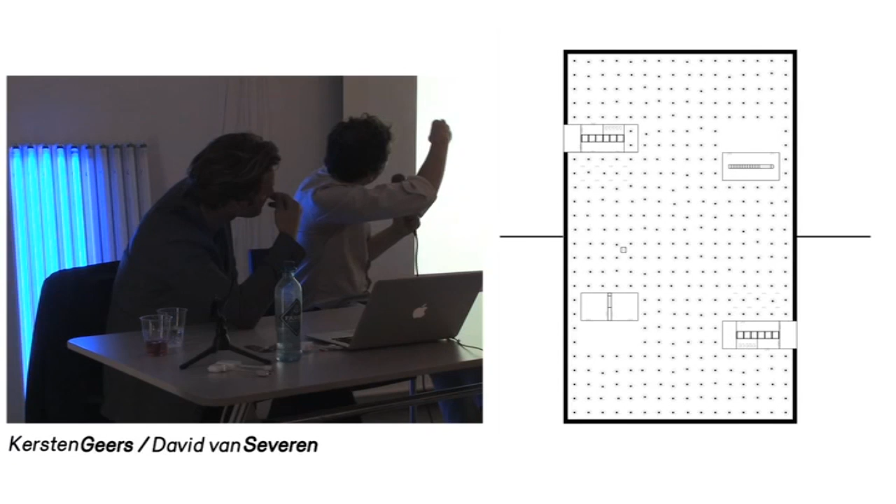You finally manage, or you don't manage, to cross to the other side, to the other pavilion, top left side. That's the whole idea, that's the procedure. Part of the question was also to incorporate on each side of the border a little library and a kind of community center. We decided to incorporate them both in the garden, but not as a result of unity, but as double twins—always two programs divided by a stair.

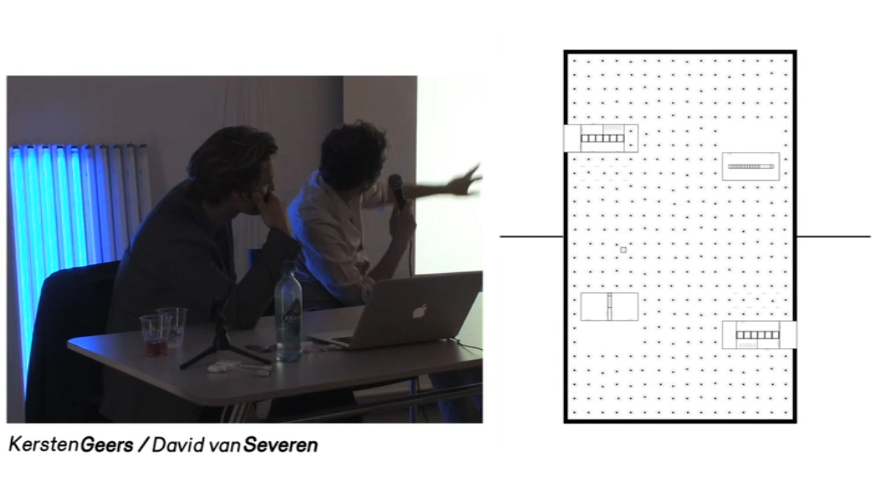In a sense, you could say the picture or painting Ed Ruscha painted, Talk About Space, is a frame. Frame is something which interests us—a frame, almost framing life as it is.

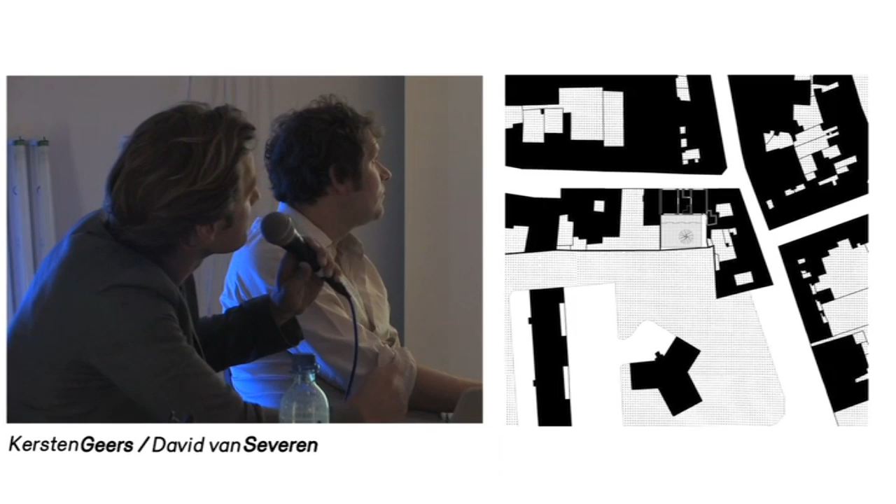The project Kersten showed before, of the Mexico-US border crossing, is of course a very good example of that. This is a house, a realization we made in 2007 in Ghent, Belgium. A house which you can see in this mass drawing—it's in the city, it's in a row, it's the one in the middle which has the tree, let's say.

When the client asked us to think about a renovation of the ground floor of that house, we saw an opportunity to actually make a new house, one which was completely the complement of the existing house.

The existing house is a traditional Belgian house, but of a big size. It was formerly a children's school, but was later transformed into a house. What interested us was the garden or courtyard, which over the years had been transformed with these typical back buildings added on.

We actually stripped the whole plan of the garden or the court to make a new house of it.

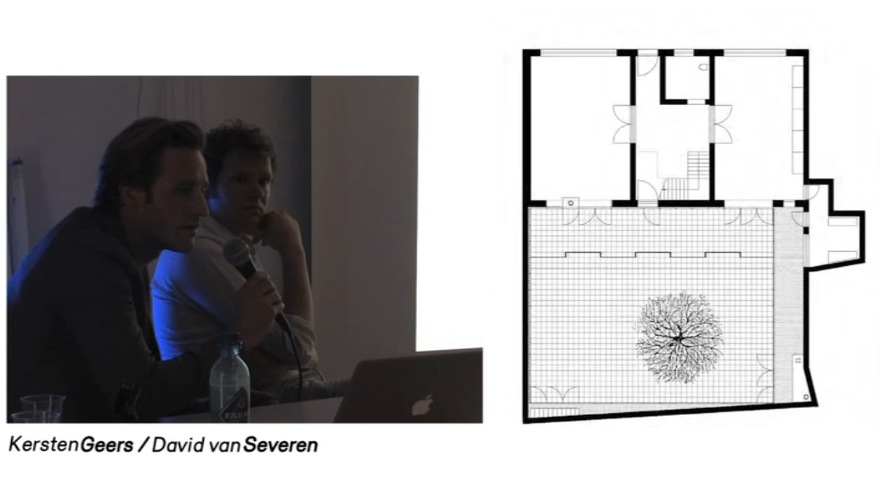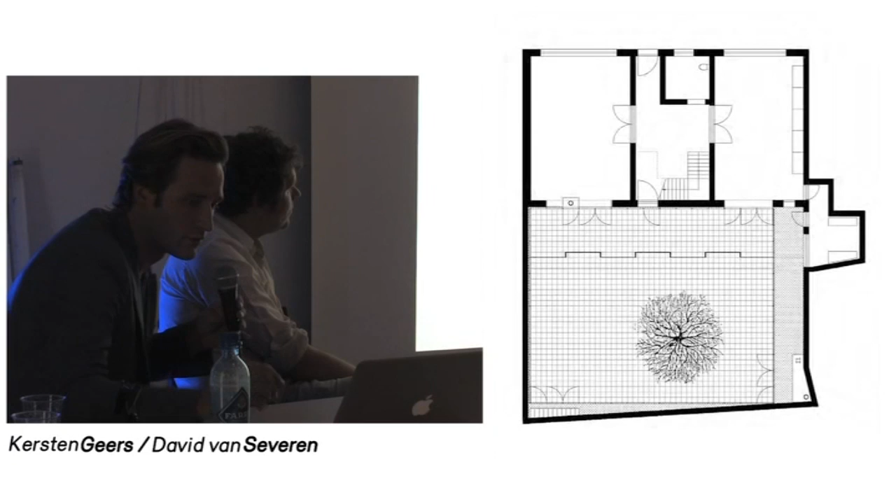By defining two houses, we could, in our opinion, make a new universe which could complement life in the original house, which is daily life as it goes. But we put something next to that, a house which is almost a summer house, a season house, a patio house, something slow in essence. It shows another world, and we designed it as its own universe.

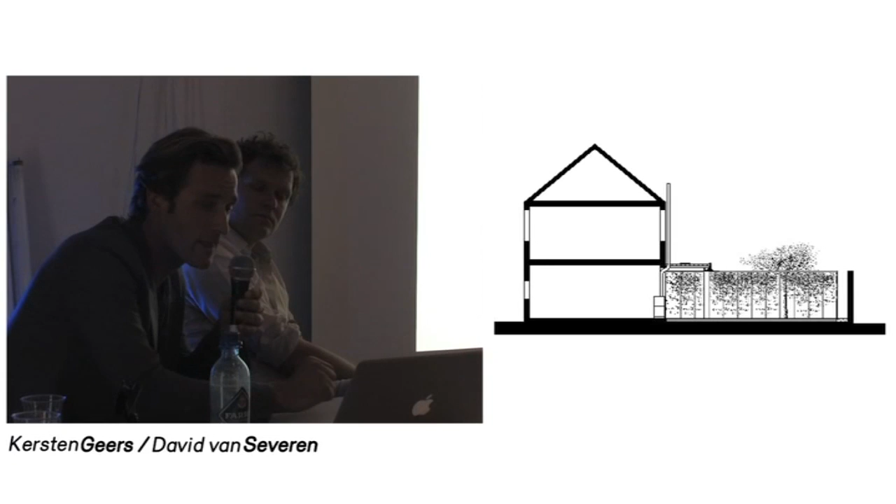As you can see in the plan, the drawing shows a grid of tiles, concrete tiles which had already been in the court, but which we rearranged into this rectangle, the defining size. It didn't fit really in the real situation, but that interested us.

By doing that, we decided to make a new horizon, a new height, which defined the height of the new house. This is a view from the winter house, you could say, into the summer house.

The confrontation of these two, walking in from one to the other, the switch of universes, was really what was on our minds.

Here you can almost see a facade, a rhythm of steel profiles, which is actually the whole perimeter of the house, surrounding this patch or rectangle of concrete tiles. That is the new patio house.

The patio house is also defined by its perimeter being a green perimeter. It's a garden, and it is growing vines. So wherever you are in the summer house or season house, you're surrounded by this modular system which holds basically Japanese vines, and these, being plants, change during the seasons.

In spring they have very small little leaves. In summer they become very big green leaves, and in autumn they color from yellow to red, and eventually fall down, leaving just the gray-brown branches of these vines. That kind of slowness was exactly what interested us.

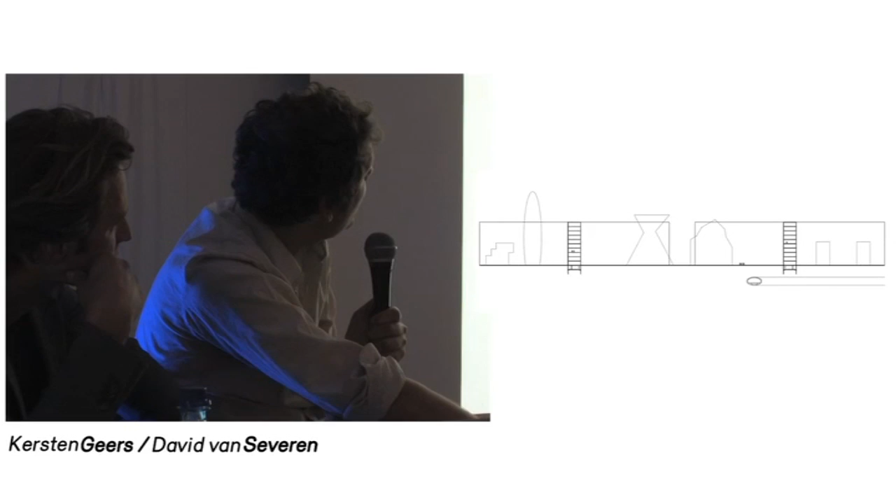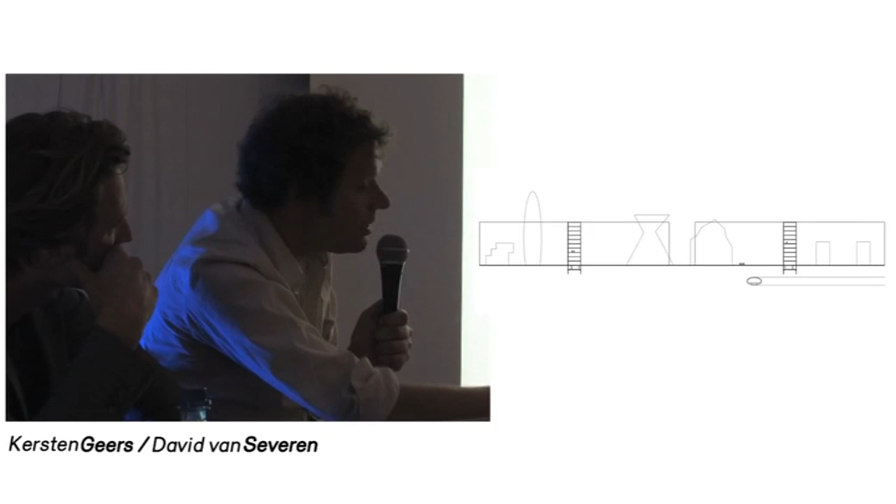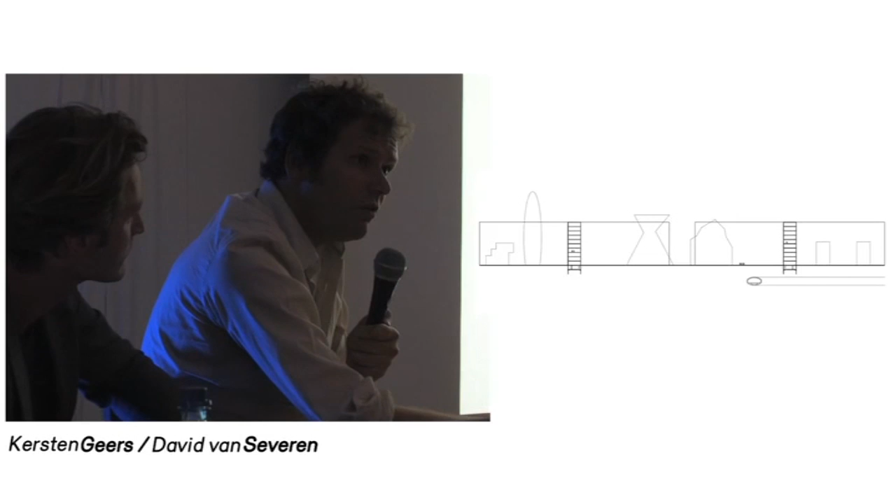You can imagine that something which fits in a 10-story high - because that was a very specific horizon which we had defined, because we thought it was important to give that city a kind of very stringent formal framework - in this 10-story high, between 12 and 13.5 meter wide buildings, there's things which fit, and all the other things, they do not fit, and they become objects or other things, or a slight little fragment of city fabric in between.

Of course, to design a city with architecture, to design it with building, does not start from a naive idea that there's no transport. It's rather an idea based on the fact that if you design a city today, which is built in the next 20 years, it's at least questionable to base that on the logic of transportation of now, knowing all kinds of questions about it.

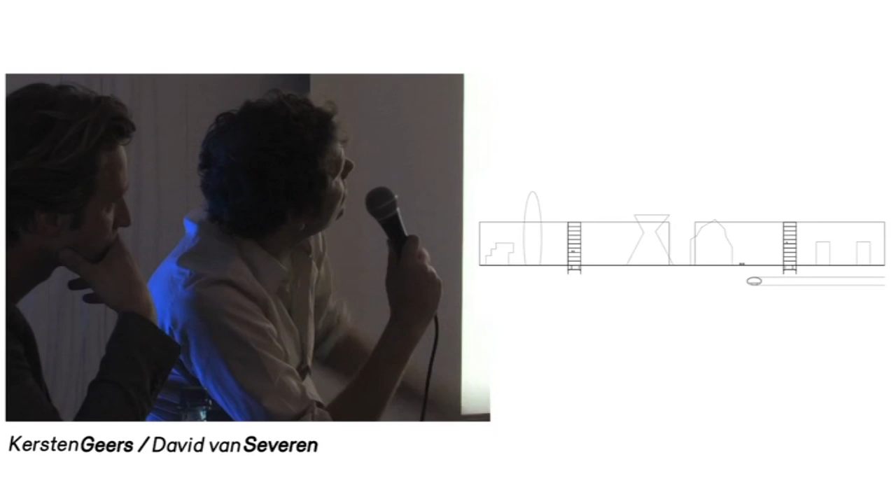So in other words, we thought it's a perfect moment to present the opposite - not forgetting about the way you could move around in such a city. A city of 3.5 by 3.5 kilometers is roughly walkable. Still, you can imagine metro or all kinds of other trams to make shortcuts. You can see that here in that section.

Ultimately, it is a city which is designed by that what in these perspectives you take away. So there's this fixed height, there's the fixed amount of dimensions which make the roofs. But the city life itself, life as it unfolds, is here represented by all the vividness and the colorfulness of the collages. So we made a set of collages showing what we were after, in which the architecture or the framework of the city as such, we cut out.

You see it here where, in a way, the infill becomes so big that it kind of inhabits the whole space, for example. Or you see it here where you see the cutout which defines the border between city and land. Because you have to understand that the proposal for a new administrative capital in South Korea was triggered by the idea to make, you could say, an anti-Seoul.

Seoul, the capital of Korea, being a sprawling city from a set of more or less specific centers which has no real border, the new city proposal has a very clear border and in fact develops from its border, and has, from that formal engagement, through city over citizenship, brings in this notion of collective responsibility, who knows.

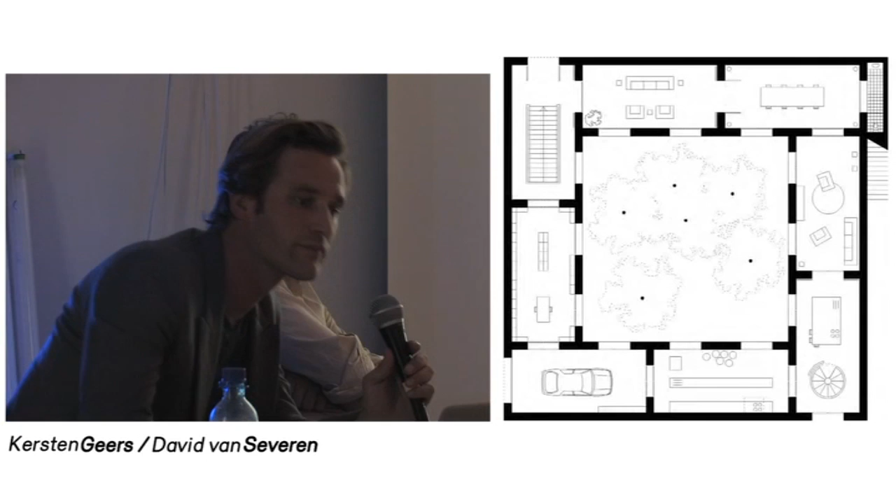I think the plan was very simple. You have to imagine we got a program like a Bel Air villa, with a big living room, the dining room twice, 2 kitchens, 2 garages, a library, 7 or 8 bedrooms, the master bedroom, and so on — everything in a big size. We thought the ultimate luxury could be that you just organize all this program in one typology, one room of the same size, which you repeat basically. In this plan, you can see it 8 times.

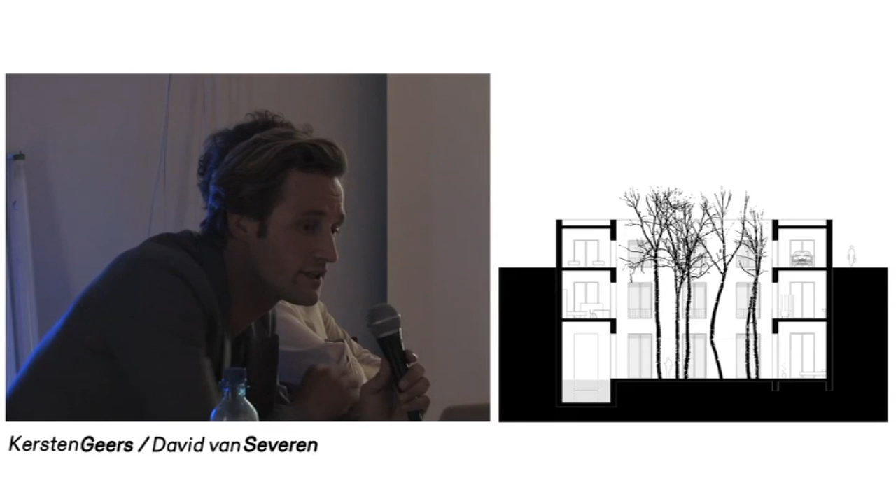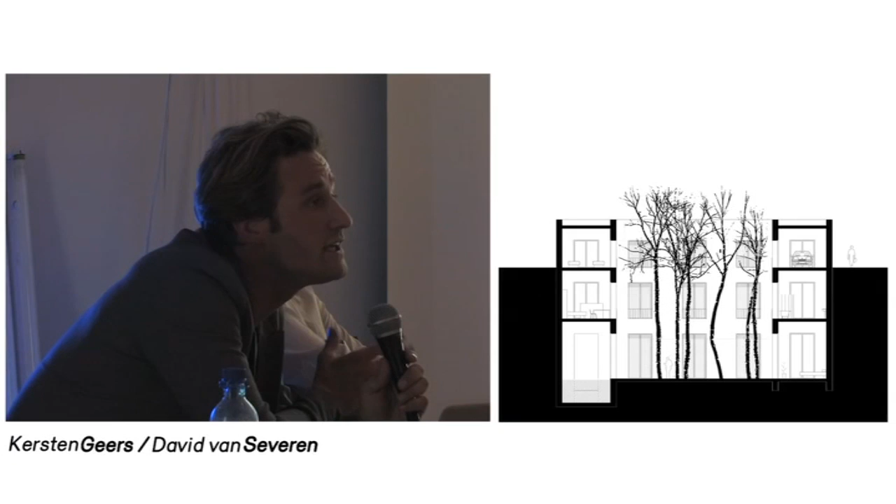But ultimately, the villa was keeping a low profile because it was actually dug into the ground. That was for the simple reason that it could profit from the constant temperature that the ground has, and be cooled in summer and a bit heated in winter, and could also, by organization of the rooms in this rectangle, integrate a patio, which becomes almost a microclimate for the whole house, where all the rooms finally look at or look into, and are also confronted with each other.

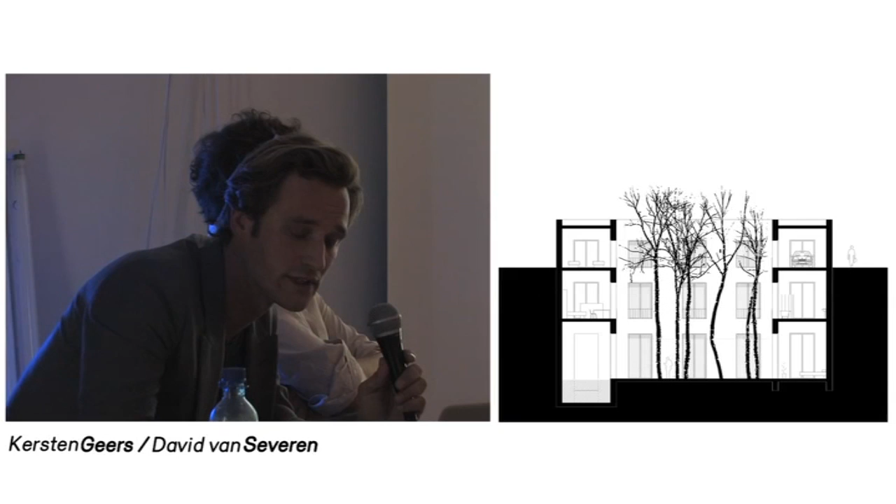As you can see also in the section, we made a slightly varying height, which got gradually bigger down to the patio level at -2.

So, after entering this almost low brick wall, you actually discovered the real space of the house, which was behind it and integrated into it, showing its pure repetition and abundance of spaces, which we thought was the ultimate luxury of that house.

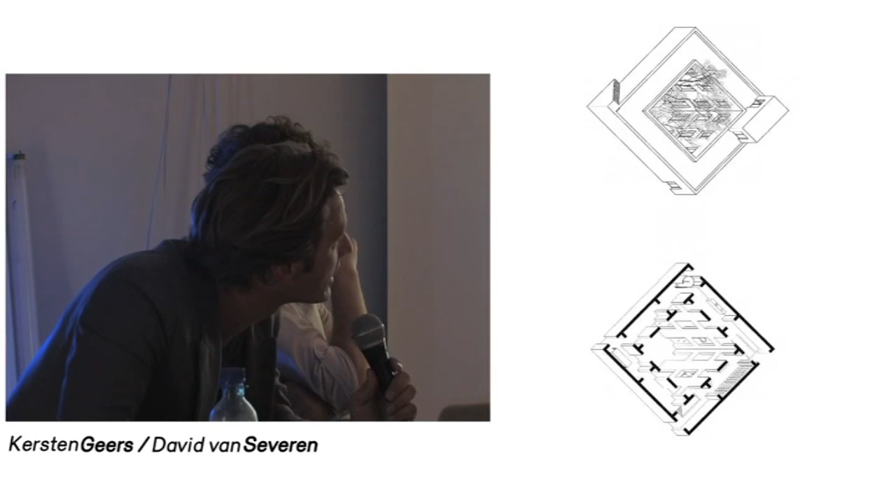And at the same time, this is an axonometric for you, which shows also that even stairs can be integrated in that sequence. The stairs going down just use 2 corner rooms — I don't know if you can see the arrow, but you can see it on the right image. These were just stair rooms, and the rest were connected by that.

Going through the plans, you saw already the ground floor plan, but if you go down, there's just a set of bedrooms and shared bathrooms, until ultimately you come to the lowest level, where there is the master bedroom, the master bathroom, everything master, a gym, and so on, and the patio itself, where we also had to put in a sauna, which we put outside in this space — something I think up here is very well known.

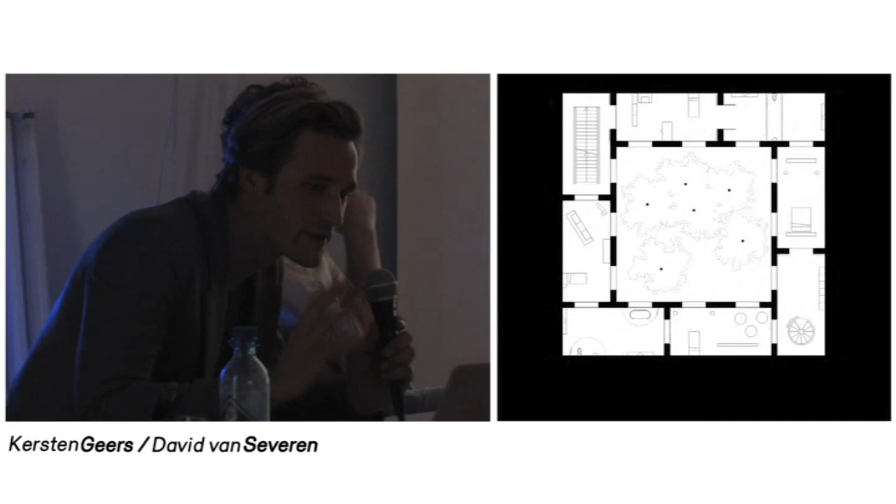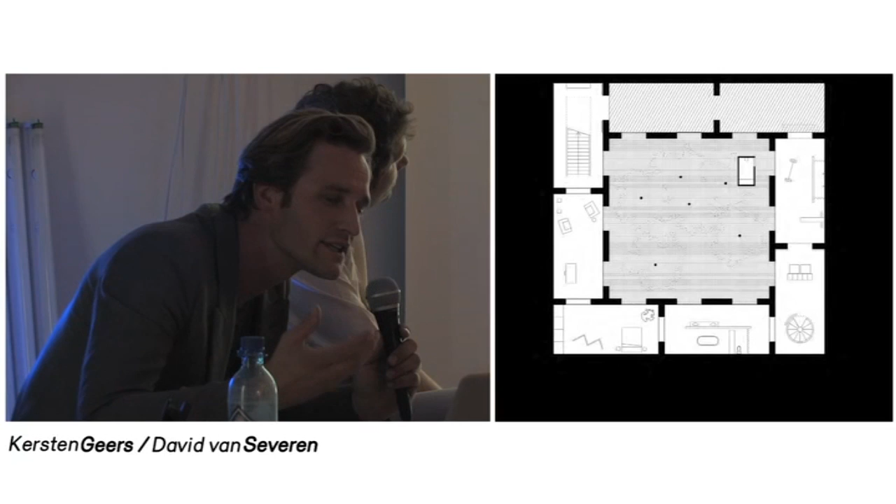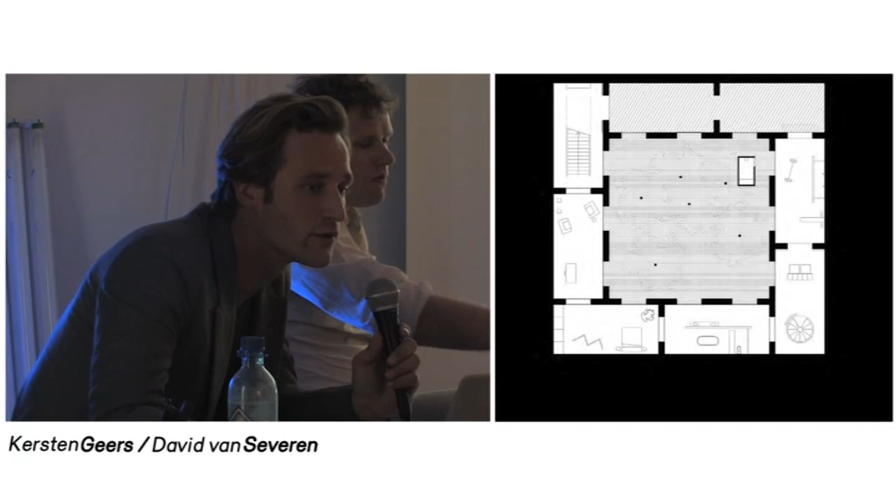Even the pool was just a set of these rooms. What interested us is the simple gesture of making everything together, unified in one typology, being a room of 4 meters by 8 meters, and making a house or villa of 1,000 square meters by organizing it like that. So ultimately it could give perspectives from, in this case, the library to the garage.

Or even an enfilade of rooms, which is the bedrooms, which weren't cleaned up at the time. And then of course also the pool. But what is actually the title of the project, finally, is we called it 25 rooms. And 25 rooms, if you count really well, you have 3 floors of each 8 rooms, which makes 24. But that brings us back to the first image, actually.

The program was also asking for a servant's house, which was, I think, if I remember well, 30 square meters for the servant of that villa. And by putting that on top of the house - and I can go back, it's a big way back, but here you can also see - it almost symbolized the gesture of the whole house, and gave a very specific spot for that person on the house, almost like a watchtower, but he had also the view out. So in a sense it's ambiguous how you see that, and as an exception almost, it shows the rule of the villa, which is essentially below.

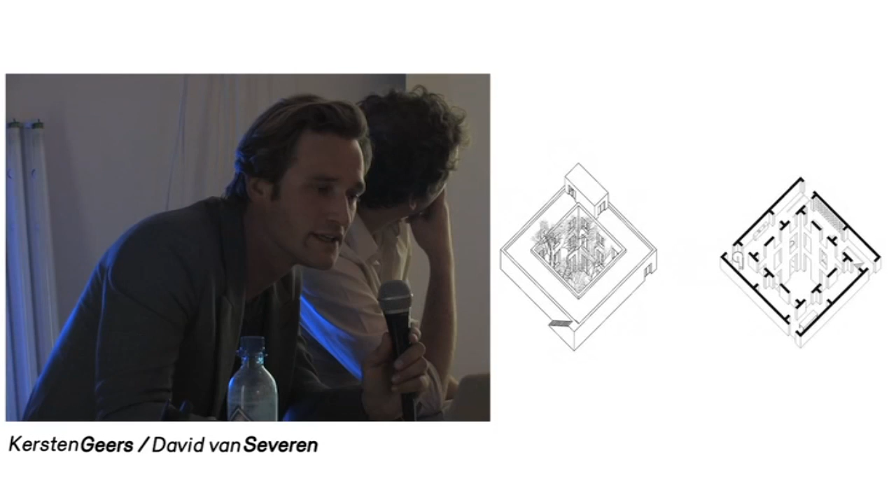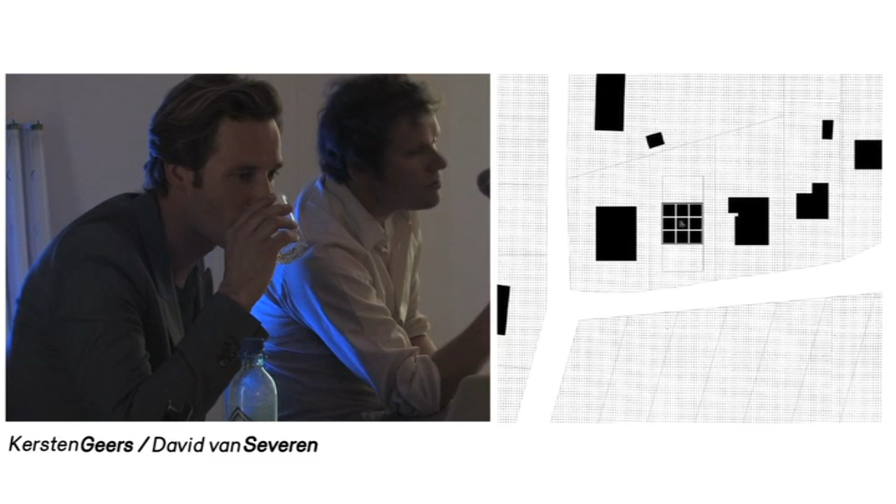In many ways, this house is family. Well, I guess every project is family, but this is even very close family to the Orlo's house. As opposed to Orlo's house, it's a house we have just recently completed. It has certainly one element in common, which I guess came through developing the Orlo's house, which was this fascination with making a house with all the same rooms.

Here we are talking about 2 times 9 rooms, so 18 rooms, slightly smaller, square rooms also. That was certainly something which, since the clients asked us to make a house in which they did not have a clear demand on how they would live in it. They thought maybe 2 bedrooms, maybe more, maybe the kids sleep separately, maybe together, maybe a living room, maybe not, maybe a study, maybe not. And they thought, it's okay, we're flexible. So is it possible to make an extremely unflexible house for a flexible way of using it? That was certainly one thought.

A second thought, which maybe you can see best on this drawing, is a more contextual one - I don't know to what extent that's applicable here to Norway, but in Belgium you have amongst many people this desire to build their own house, and there's not so much space, and there's some rules, although rules are often messed up. One result of that is there's a lot of small plots which people buy, and pay a lot of money for, and on that they can build their own villa. Well, they call it a villa, but in fact it's a house, and it has always very little space around it.

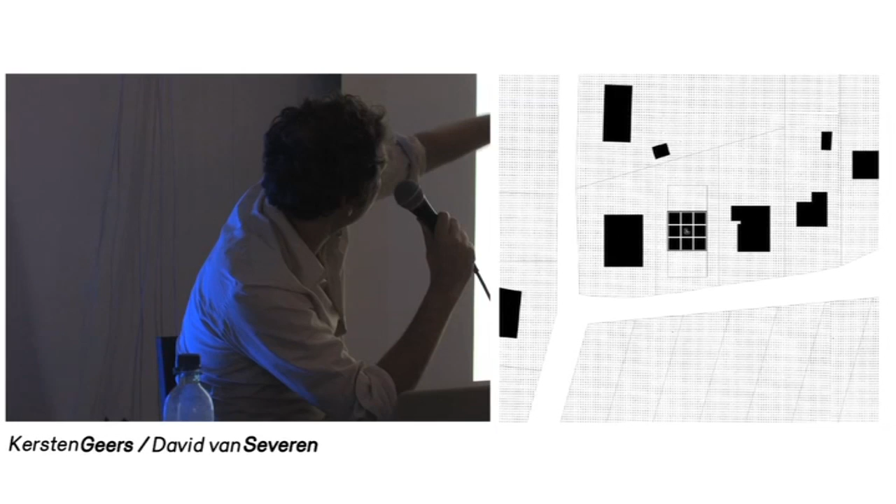In this particular case, you see left and right from our house - so our house including 3 plots - slightly below another black spot there, which is in fact a farmhouse of a farmer, not a very beautiful one. This farmer decided one day he could make money, and he could divide his plot into 3 other plots and sell them, and he sold them in 10 minutes, because people are really hunting for it. Our clients were second, so they had more or less a second spot.

They were lucky in the sense that often you have these plots multiplied everywhere around, a bit like in the Orlo situation, but here in the back of the house there's a forest and it will stay like that, and in the front there is a piece of agricultural land, and the idea is also that it will stay like that. So despite these bizarre neighbors left and right, buildings which were built simultaneously with our house, there's nothing else. That's another aspect of the building - this common situation of building in an allotment where the border between you and the neighbor becomes super fundamental. The border becomes a fence, the neighbor stands on the fence, you know.

Although a villa may ultimately have the notion of living alone in the wilderness or in the landscape, you're always living with your neighbor. So we thought, is it possible to move the border, the frame, the hedge, the fence, from the line you see between the neighbors to being part of the house? Can we make the fence part of the house?

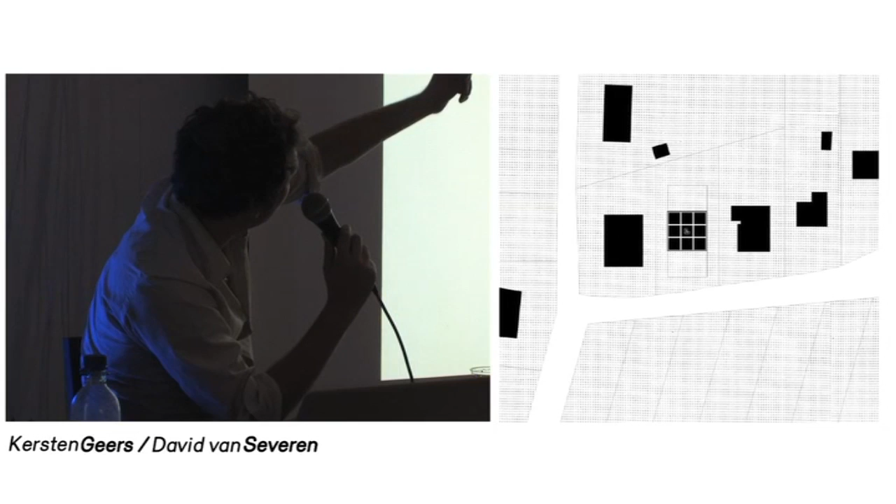In other words, almost as a gesture of ultimate luxury, we have the house, we have the garden on top and below, and all the rest, over time, is wilderness. We give it away, so between us and the neighbor there's wilderness. A very small patch of wilderness, but wilderness nevertheless. So here you see that idea.

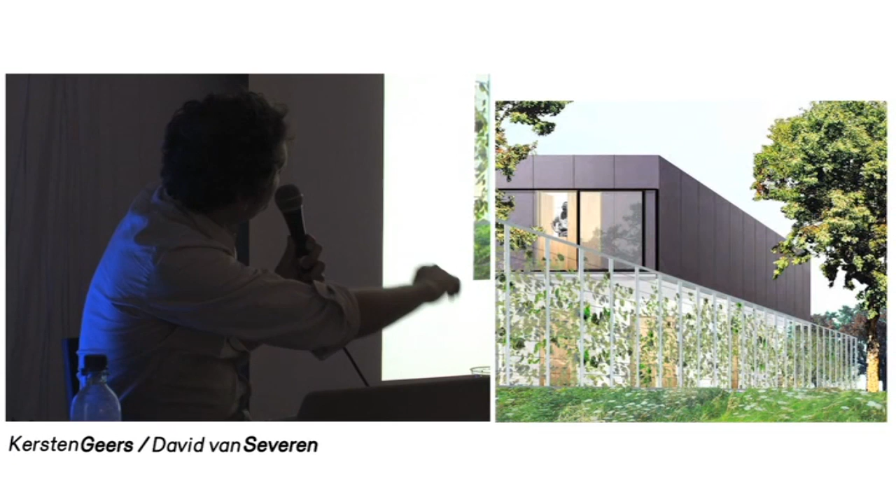There's the house with its equal rooms. There's the fence, which becomes part of the house, becomes part of the form of the house. It's very gentle wilderness with the flowers here, but it's wilderness.

Maybe a third element: we wanted to make a house which is at the same time finished with this kind of bitumen plastic roof structure, following the same rhythm as the structure of the grid of the frame of the fence, and below a mineral house, built in brick to be painted white, not entirely yet. You could say it's a smaller house in winter—only a kitchen and a table to eat—and in summer it's the full 9 squares being part of that garden.

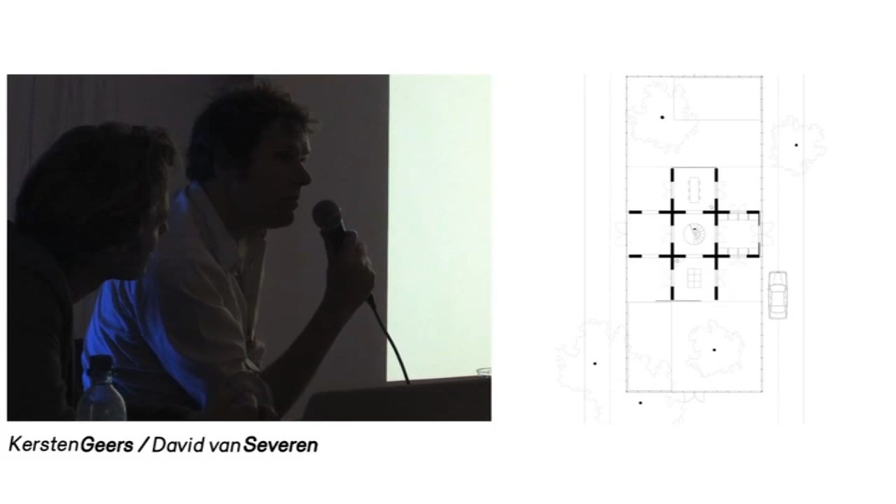So here you see the garden plan, or the 0 level. In front and in the back, or the opposite way around, you see the gardens, almost like patios to the house. You see this fence, you see the 9 rooms, of which only the middle rooms—there's a stair above and below, there's a table and a kitchen.

On the right side there's a storage kind of built in as a wooden box in that house, and on the left side there's an entrance space. But all the other spaces, including the entrance space, are just covered, not insulated, no real closure, only a roof—the roof, which is ultimately the floor of the winter house.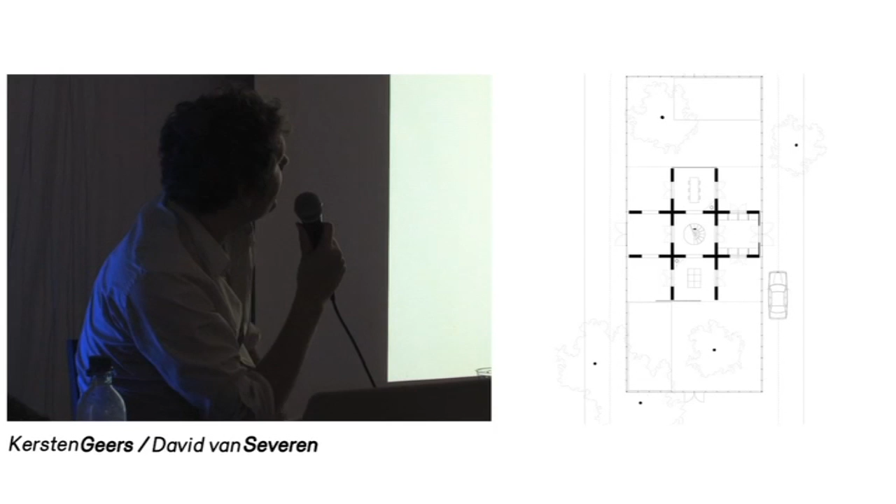At the same time, that fence being part of the house makes this space around it where the car can park. So typically you have a parking in front of the house on the street, you have the entrance, that place, and so forth.

We wanted to break that sequence as if the house has another orientation. So left and right of the house there's the doors, front door, back door, or the opposite way around. The cars park in this leftover space, which is a space where you cannot build between you and the neighbors, in that piece of wilderness, and ultimately they can drive around if you'd like to do that.

The top house is this wooden house, as we said. The stair in the middle brings you up, and then the other 8 rooms, which are left and right from the stair—2 bathrooms and rooms. Here you have a possible infill with a couple of beds and a couple of tables, but they're even using it differently now.

So this is like 3 pictures of the house in winter. It was in, I think, January, because it was snowing a lot in Belgium, at least for Belgians. You see left and right—first neighbor 1, who was built simultaneously with our house, and then the second neighbor. You see the fence, of course, you see the plastic of the second floor.

You see these sliding windows. I didn't mention them, but they're kind of important to us in the sense that there's only these windows to either the landscape, the open landscape, or the forest. But the windows are conceived as openings from the inside, so the frames are put in such a way that you never see them. Either the windows are completely open or completely closed, but even then it looks like just glass. Below we do the same with a much bigger stainless steel or galvanized steel window.

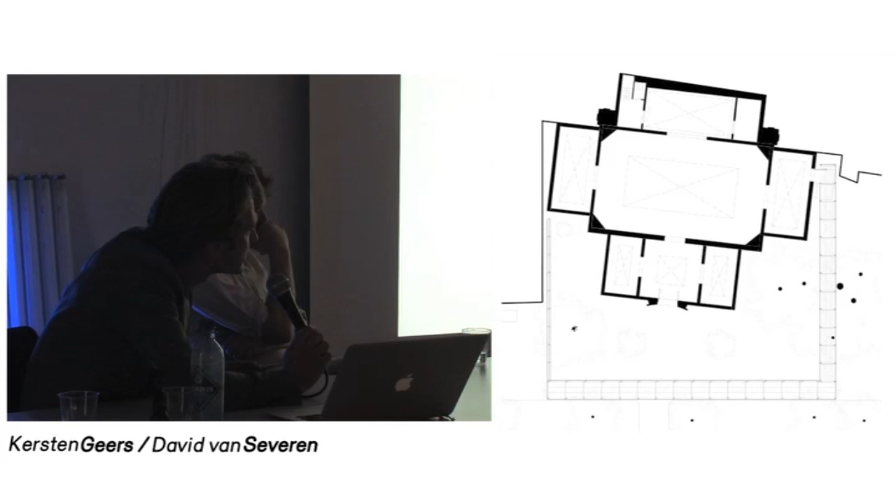In our idea, as you can see here, we reframed the Belgian pavilion with this construction. This is already a worked-out drawing, a bit different from the original competition drawing, but this is how we finally managed to materialize our gesture, our idea, our new pavilion for the Venice Biennale 2008. Basically what it does is show a new Belgian pavilion for 2008, reframing the old pavilion as almost a piece of architecture. This is an image from the outside.

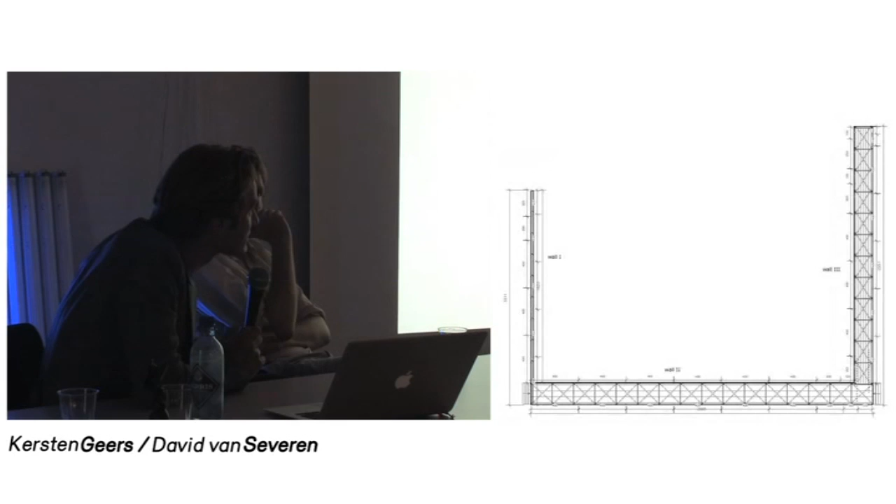As you can see in the plan, we were very conscious in designing the new pavilion, because in our idea it could not look temporary, like event architecture—that doesn't interest us. It was really a piece of architecture designed in detail, modular, made out of real materials—in the end, a scaffolding system in Italy, a very beautiful Italian scaffolding. Everything in Italy is more beautiful, of course. We redesigned it as a modular system, allowing us to make a wall which could be self-supportive, stand 7 meters high, and be 20 or 30 meters long on that side, which in the end became the pavilion, the new frame, the new Belgian pavilion for 2008.

Also structurally this had to be calculated for winds and so on. But finally it gives actually a very crucial spatial experience.

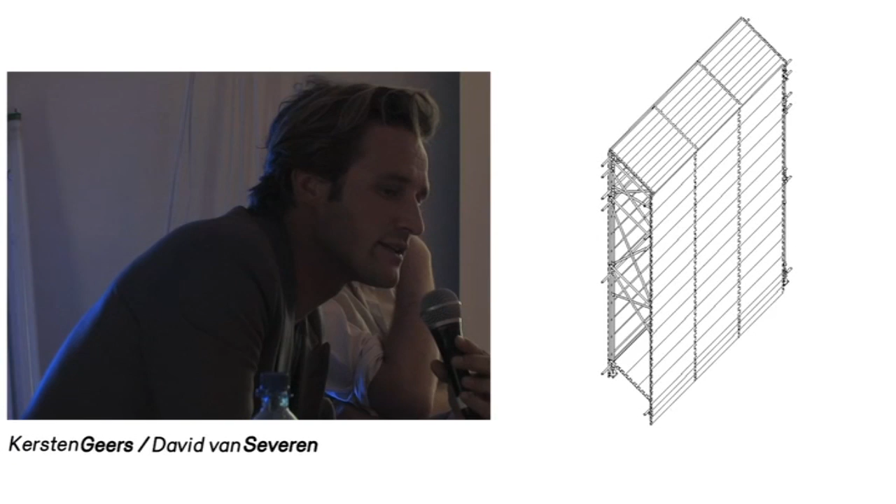As in the picture you saw before, you saw the little hall which was the actual entrance of the new pavilion. It was standing on a little side road next to the access going to the Italian pavilion, and it allowed visitors to enter the inside of this wall as almost a strange niche, almost alienating you from the context of the Biennale and transporting you to the back side of the pavilion.

A strange little back door - if you noticed the plan, there was a little side door on the right, and there you could enter the pavilion too. It's the back entrance, basically, it's a service entrance. So after walking through this, you came into the original pavilion.

Something which was, of course, strange as an experience, and as we didn't really want to exhibit architecture as a representation, we just said we'd show the pavilion how it is. Today, after 100 years of transformations, it's basically a white box with some roof lights, and we took off the protective film of the roof lights to have natural daylight in the existing spaces.

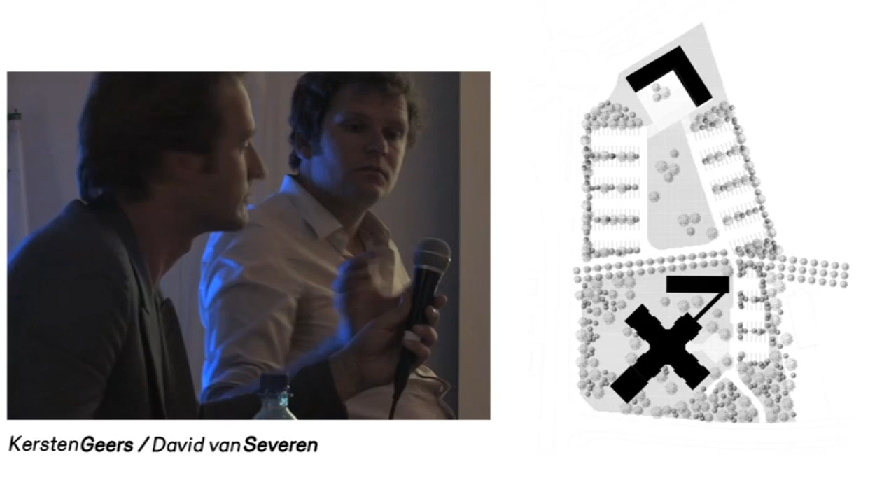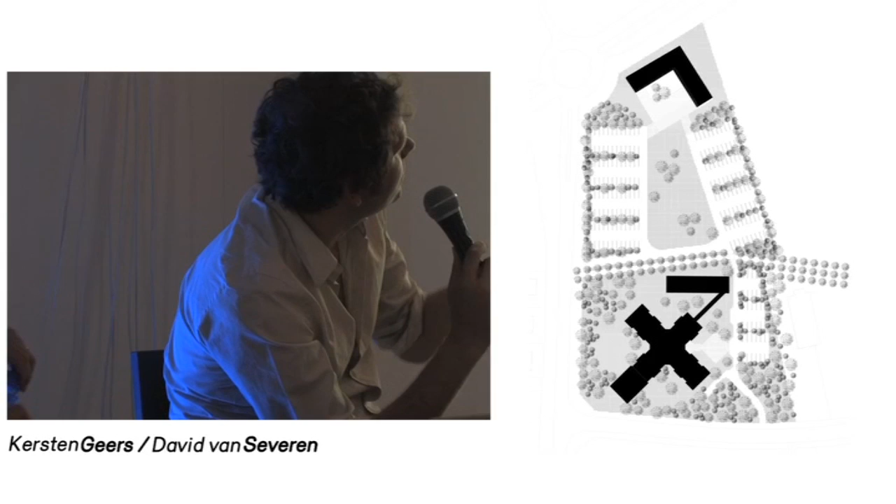I guess gradually this Biennale project gave us another insight. Until that moment we were often making very specific spatial definitions, frames of spaces, through making a complete intervention. In houses we show rooms, and the house we showed before the Biennale shows this big perimeter, which is a fence, things like that.

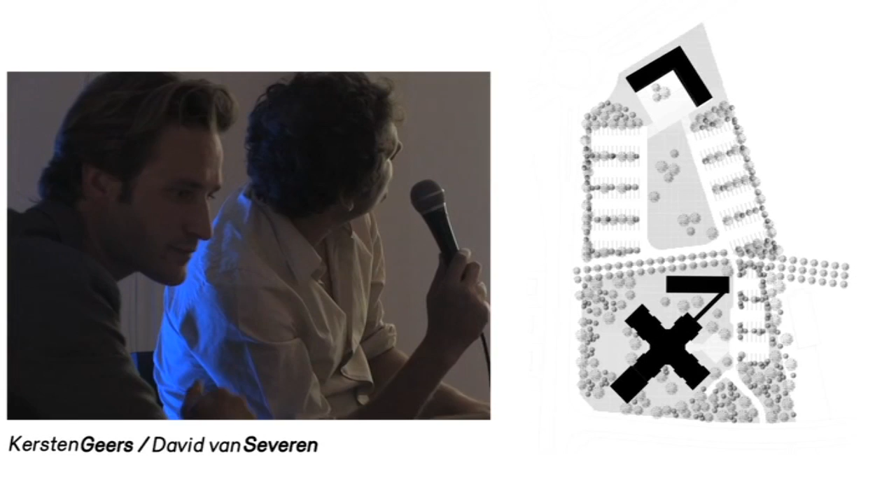In some way, the Biennale project gave us an insight which we thought was very interesting - that it was in fact possible to make an L-shaped intervention and somehow still have the same effect. So it wasn't really necessary to complete the perimeter. That was intriguing. So when we did this competition for this office building, Chamber of Commerce, we were playing with that idea, I guess.

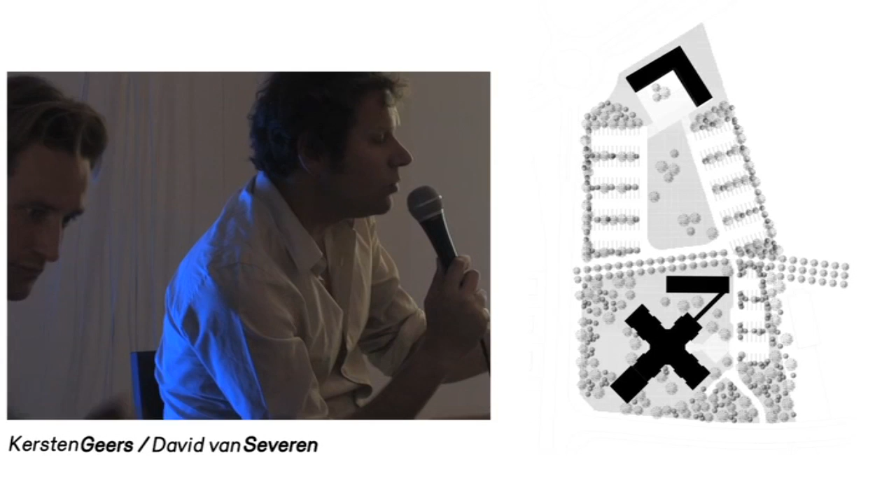That was one aspect of it. At the same time, of course, it was a very pragmatic competition - for an office building for the Chamber of Commerce. So it's a program which is extremely pragmatic. It's people work. But it's also very representative.

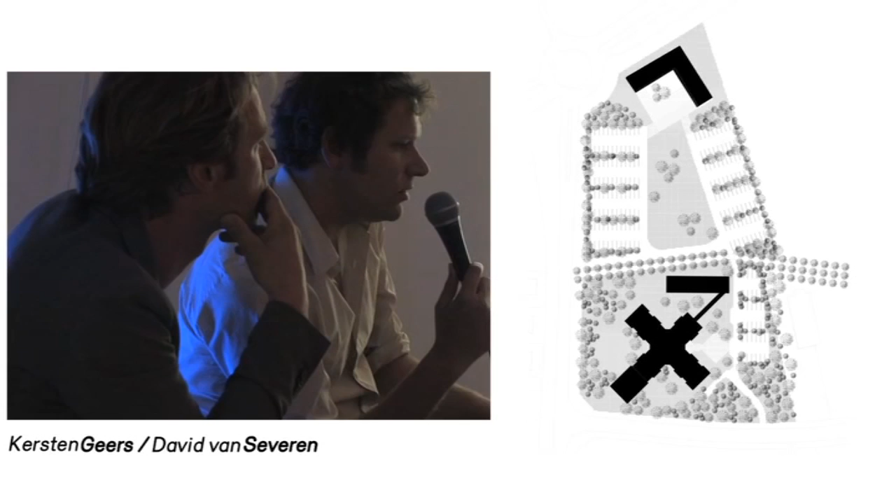It's a Chamber of Commerce, so people who come and visit them, although not too often, have to see them working, or see the kind of idea of what the Chamber of Commerce could be like. And so when this complex had to expand, the city of Kortrijk asked us to make a master plan, because it couldn't keep on growing. This is a site which is already quite congested, has problems of parking, of the public and so on, and there was a need for a thought on this area.

So how to deal with such an area which is basically only backsides - it's boxes and docking stations for trucks, cars going wherever, and so on.

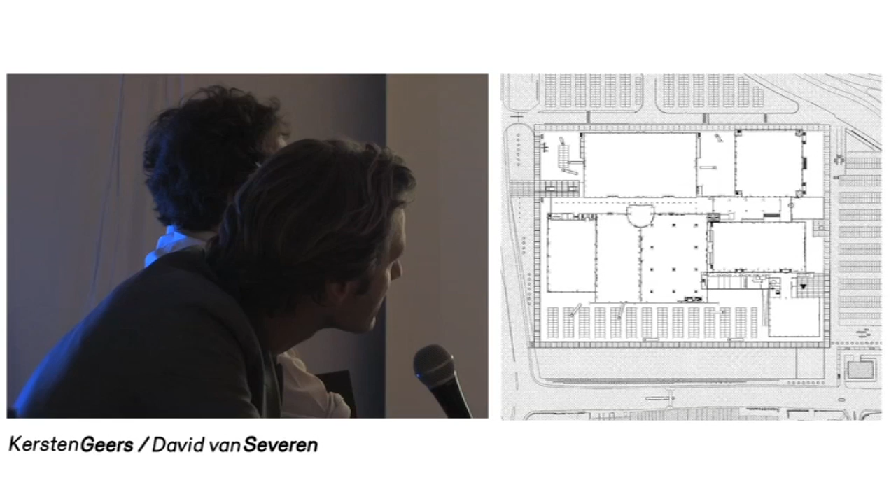And actually, we made a master plan which almost takes that as a reference, but takes it very seriously. The existing huge halls of this complex, you can see trucks and parking places. It's quite gigantic, I think more than 80,000 square meters.

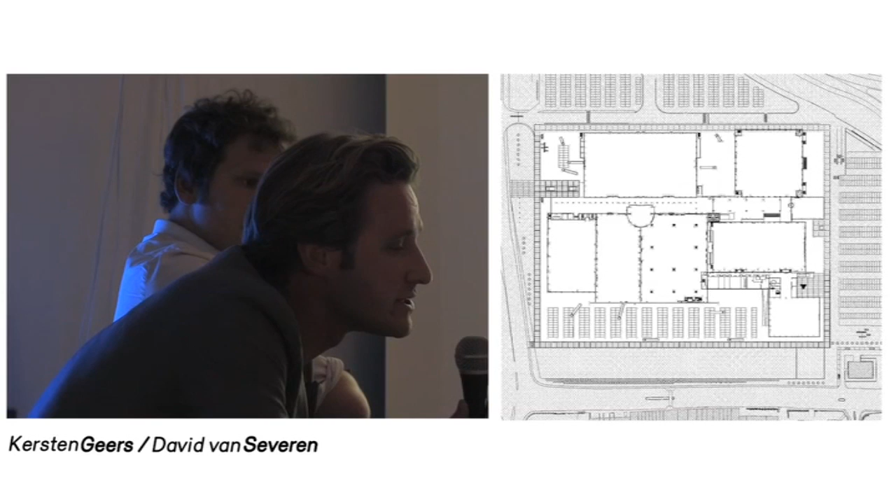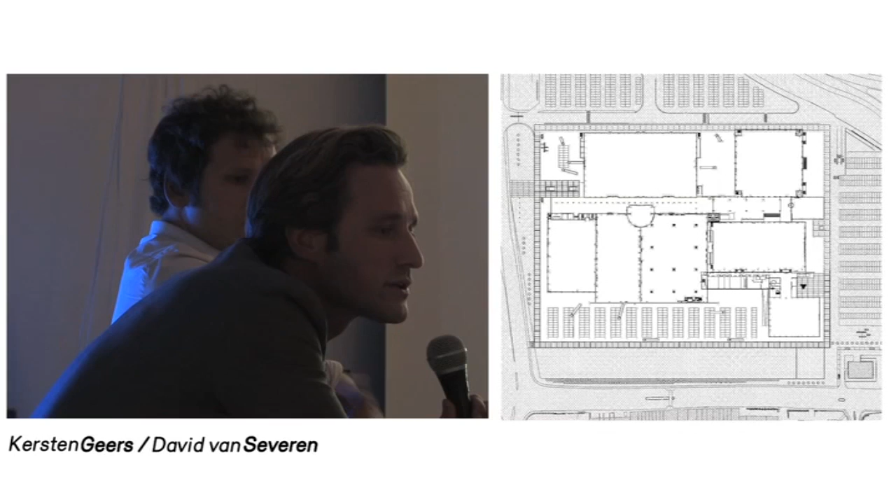Our idea was that the only thing this needed was actually a frame where suddenly there was a clear idea of what is inside, what is outside, and which reorganized the whole complex as almost a city which has a city wall. We almost compared it with the Medina, as you have in North African cities, the old city wall capturing what is in and out, and by doing that, making hierarchy. So making that frame allowed us to say, this is expo, this is not, this is parking, this is public, this is green, this is not green.

The frame was actually a real spatial divide for definition, definition of such a complex, of an extreme big scale, towards a visitor who has almost no overview on such a thing.

And what is intriguing is that the complex is actually built on a grid with one size. The architect building it for 30 or 40 years decided at the time to build it on a grid of 570 by 570, which is of course a rational decision. But that rationalism wasn't really so clear in the plan, because actually that grid was not visible. We were intrigued by that grid, by the grid that organized that system of boxes.

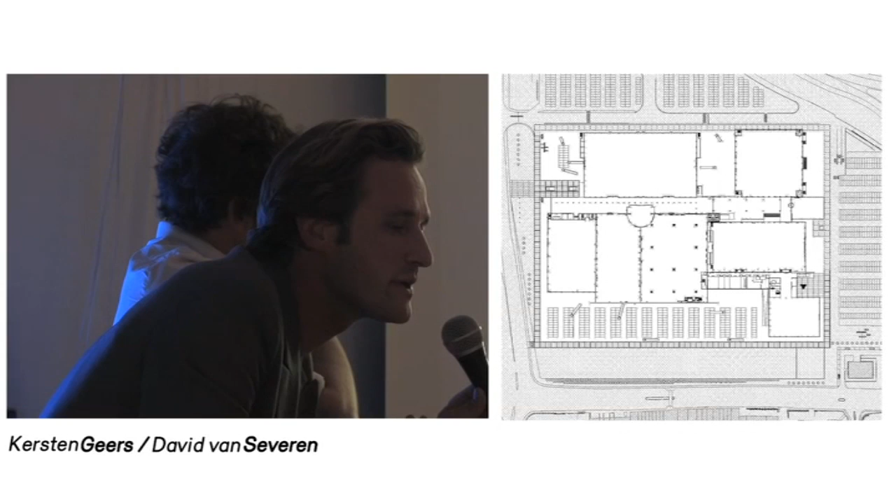Could that also be actually the real facade of such a complex? So our proposal was to make a very big gallery, a gallery for pedestrians around the whole site, which could orient every pedestrian, because fundamentally this is an area where cars come and then people start to walk, and buses stop, and thousands of people visit these kinds of exhibitions. This needed a clear frame, but also a clear pedestrian road.

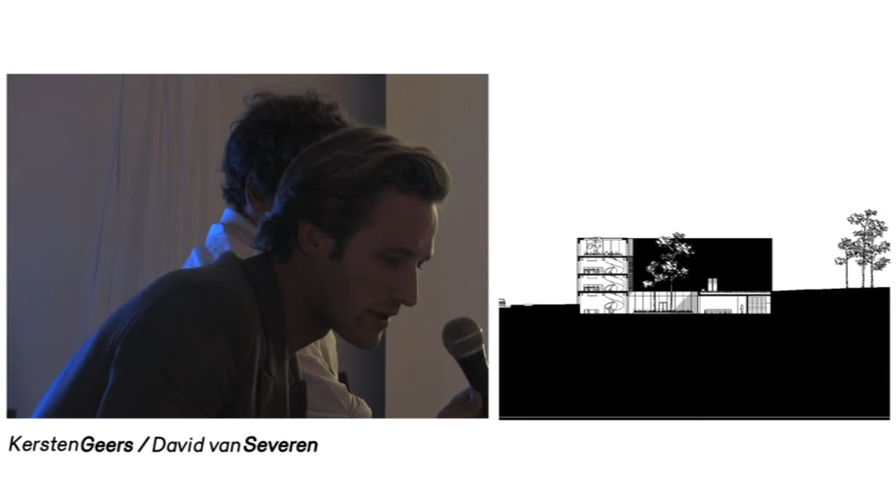This pedestrian road was the gallery. The gallery was actually made by one detail: a white painted steel column, put exactly at the coordinates of the grid, which was invisible in these boxes because of facades being added and so on. But these were exactly put on the axes of this grid, which led into detailing of the whole complex, and I'll show you later there's also a building taking up that system.

But basically, the idea, maybe even going back to the painting we showed in the beginning, is the idea of measuring such a complex. The measurement was actually already there. It was a grid, it was 570, we just had to show it.

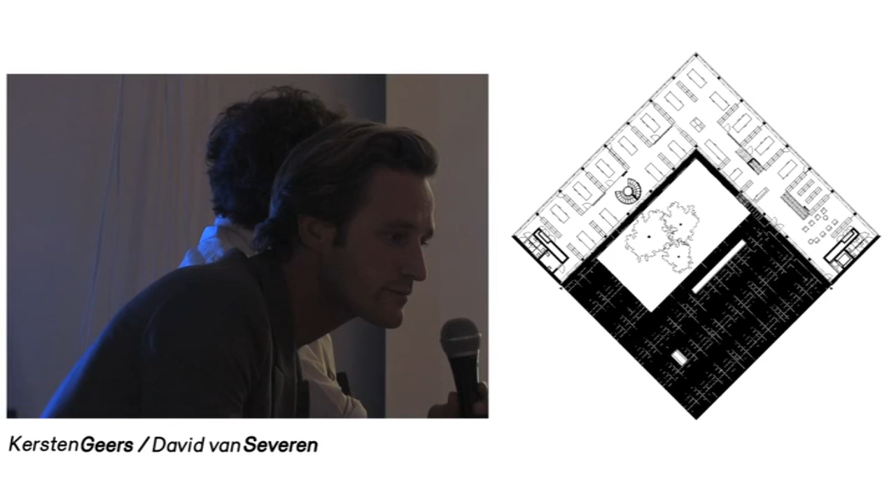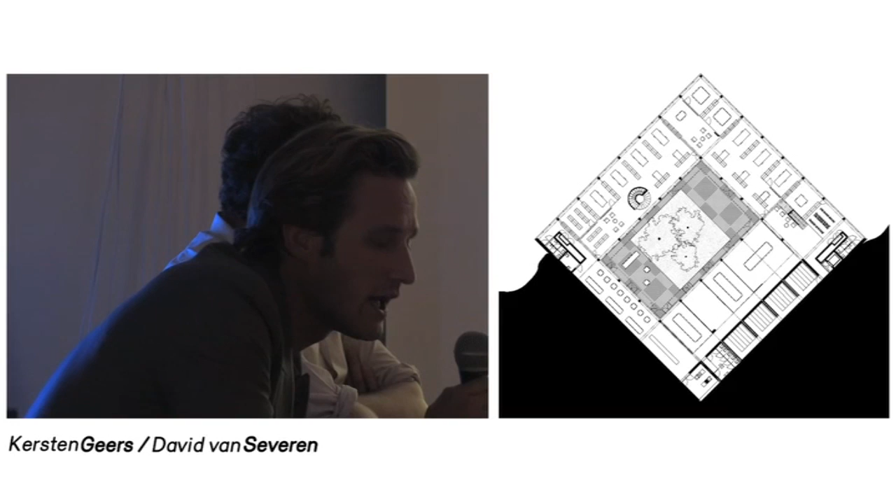In Kortrijk, things go very fast, and we got from a master plan idea immediately to being the architect, co-architect I would say, because the house architect was still involved. We became co-architect of the whole gallery and the whole project, which involved a lot of clearing of terrain, flattening of the area, a new office building, a new hall, as I told you in the beginning, and organization of logistic space in general.

And for us, that frame was exactly the tool for thinking through all this pragmatism. In a strange way, the client also saw it like that, that this could suddenly organize that, and something you could say is essentially not really necessary, a gallery around something, could suddenly become the image of such a complex.

Here you can see the perspectives it gives, and in a way it's a gallery that opens itself towards the city, towards the green area, which it cuts away from the logistic area. There is a kind of steel or metal mesh, woven steel curtains, which hang inside the gallery, making almost a screen or a filter to the inside of this complex.

A filter that could, of course, still be very pragmatic and usable, but at the same time showing its ambivalence within this context. And at the same time, this gallery was a clear line between what is, you could say, park and what is logistics, translated in green and asphalt. The inside of the gallery was a concrete way.

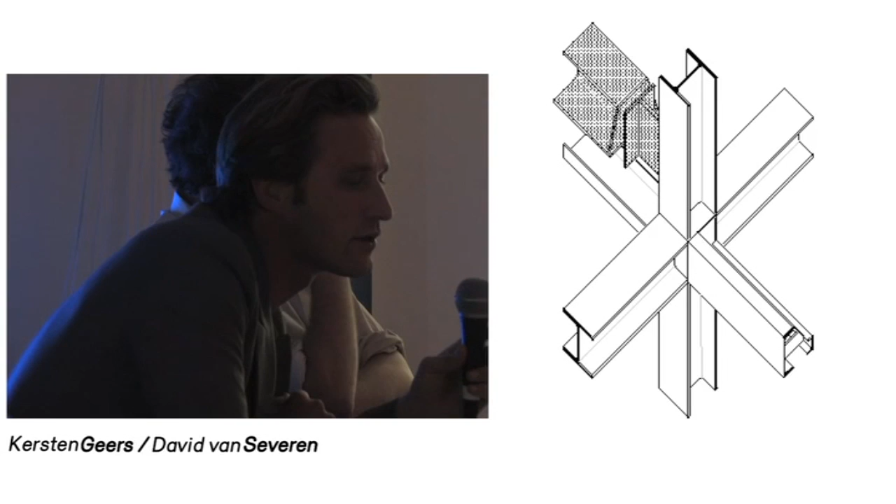And an office building, which below became an entrance hall, can become on top just the space for offices, for people organizing the big fairs happening up there. And as a strange thought, we thought that could be the head or the entrance gate for the whole system, showing again its own proportional system, but then introducing even office space in that.

And as a strange effect, the three floors of offices, we fitted them into two of the modules of 570 by 570. So again, almost revealing as an accident, you could say, this maybe in the first place absurd measure system. But by just showing it, you could give it a facade, and make, you could say, almost a mediator between the visitor and such a complex.

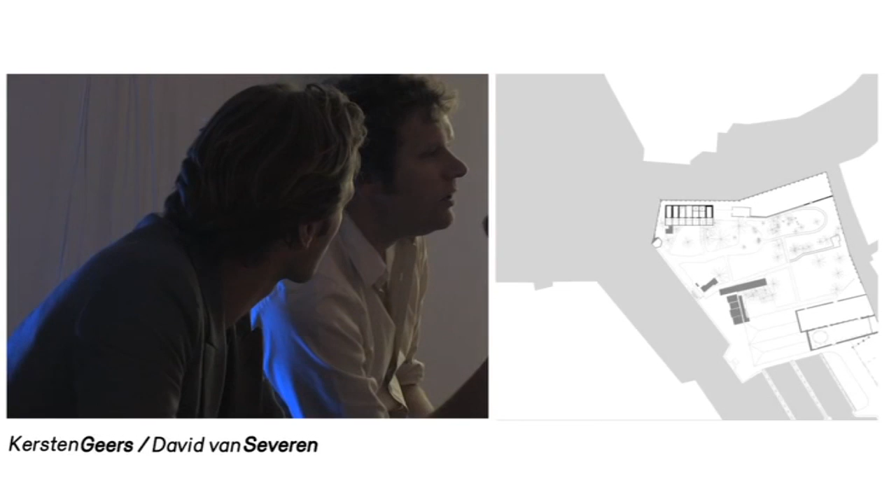To finish, maybe that sounds surprising, but when we were doing this project in the Expo, I think gradually we realized, and it was maybe not the first time, but we realized more and more that, as David just said, we have an enormous impact with doing less and less, or very little intervention, to give an existing building a twist.

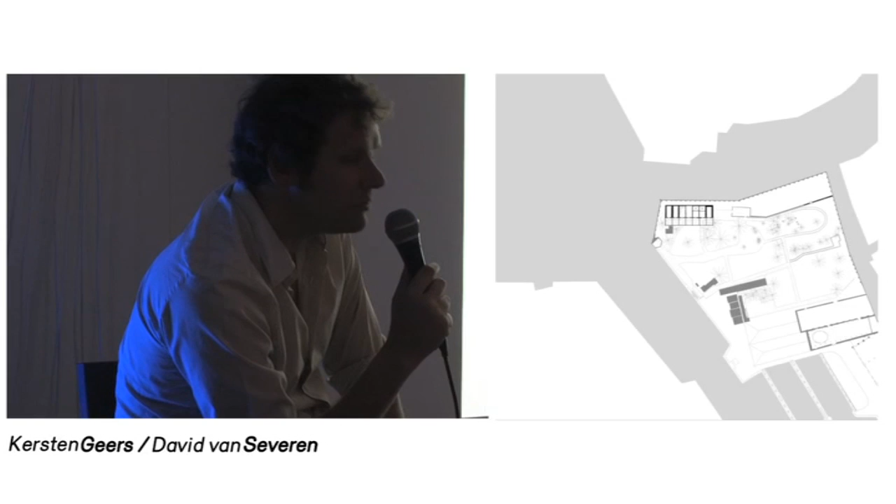We were asked last year by SANAA and Sejima to be part of the international section of the Biennale in Venice again, and that was a bit weird for us because we were representing Belgium two years earlier. As much as it felt like something really nice to do, it also felt like a bit of a possible trap, because what could we do after having done the confetti pavilion, which was either similar or maybe we had no clue—at the same time, of course, with much smaller budgets.

I mean, this international section works very differently than the national section. But then, in some bizarre way, there was an interesting condition to the Biennale contribution of ours, which was she gave us this small building you see there in the middle of the image, with 7 rooms, a pavilion, in the very, very far end of the Arsenale, of which we are convinced that only 20% of the visitors saw it, because it's so far. You must be really big fan of architecture to get there.

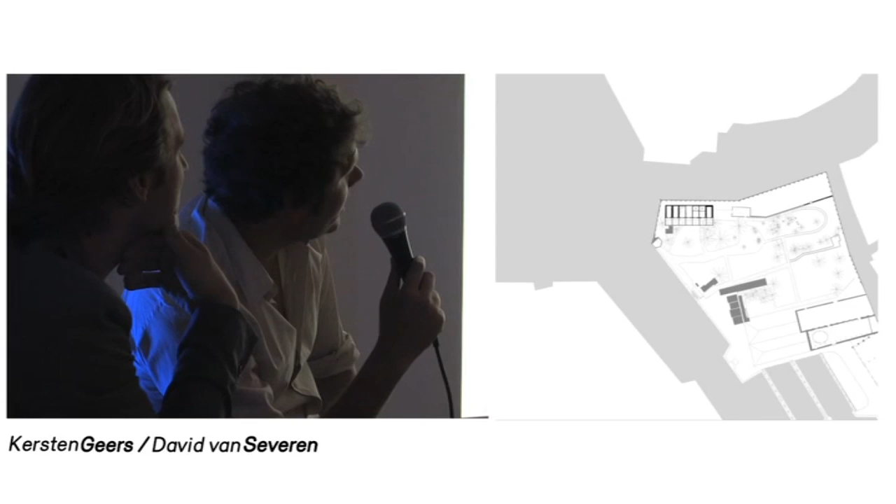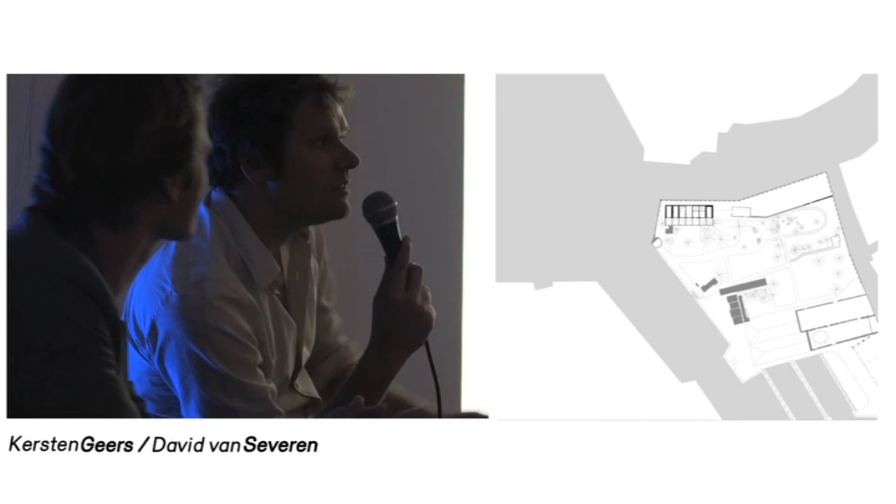Nevertheless, it was just in the back of a beautiful garden done by Piet Oudolf, Dutch—what would you call him—a garden man, in the sense that he's planting beautiful plants, and like he did in the Highline, he was responsible for all the planting, but he doesn't really consider himself a garden designer. He kind of, it's as if he's painting with plants. So we were lucky, we thought, that we had such a specific condition.

We had this pavilion, which was never used until last year as a space to show things, and we had the garden. So we thought it was evident we were not going to do another intervention. We thought, let's do something else. Let's show something which maybe indirectly we had been carrying along for a long time, but we never made so explicit.

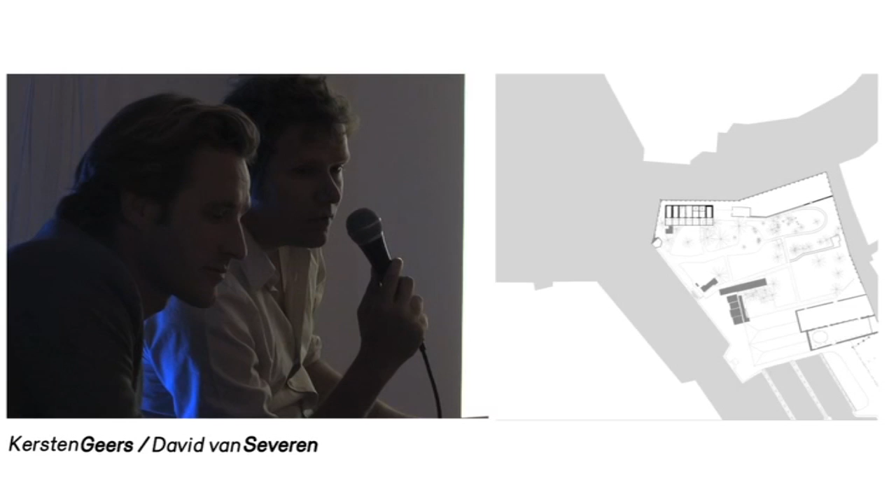We asked our very good friend Bas Princen, of who you see a picture here, but in fact of who you've seen a lot of pictures until now, because all the pictures, apart from the snapshots of the house with the fence, are all by him. It's a very good photographer who we had the luck to collaborate with, in the sense that he never takes pictures really of architecture as documentation, but he just takes pictures as autonomous work. And so this kind of parallel track over 7-8 years had been extremely inspiring.

So he makes work, we make collages, and of course there has never been, maybe apart from one project which we didn't show today, a direct link where we did it really together. But since we meet each other very regularly, like weekly or every second week, there is an obvious echo. So we thought it was a great idea to show architecture through perspective: on the one hand, constructed architecture in the framing of the photographer Bas Princen; on the other hand, the imaginary, but also somehow constructed, and sometimes later really constructed architecture of our collages.

So, in order to show the work, we decided very simply to use these 7 rooms, to show always one or maybe two projects in each, or I better say one or two duos or couples of perspectives of ours, a collage, and a picture of Bas in each of these rooms.

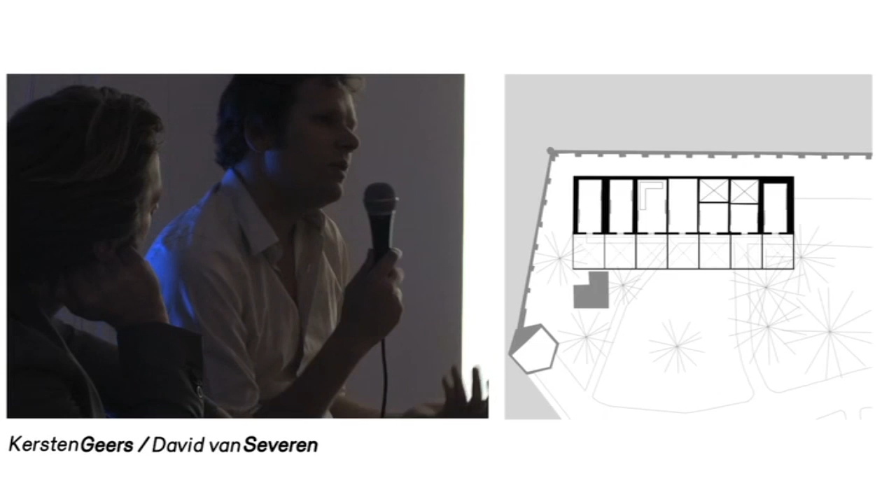While doing that, we realized that in a bizarre way we needed again an architectonic intervention to make it happen. The garden is nice, but the rooms always have these doors in front, and you have to enter a room, leave a room, enter a room. We were convinced that if we didn't do anything, people would go to one room, get bored, and walk away. So we thought maybe we need to connect the rooms.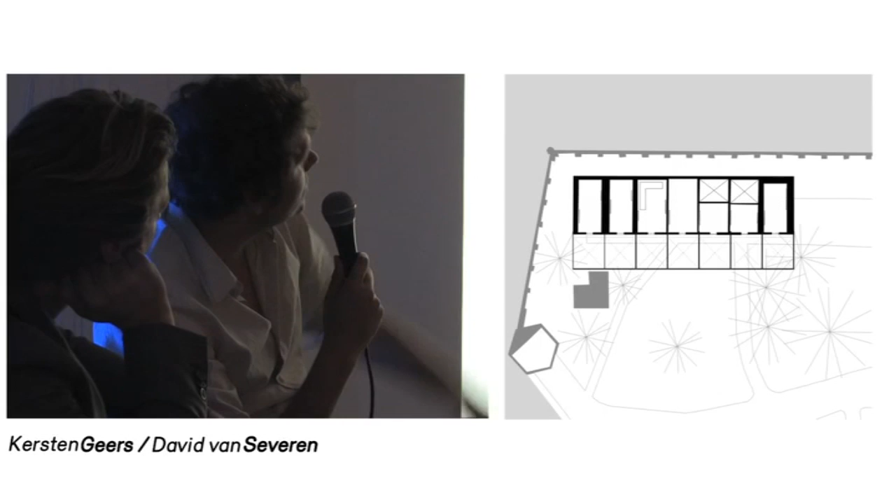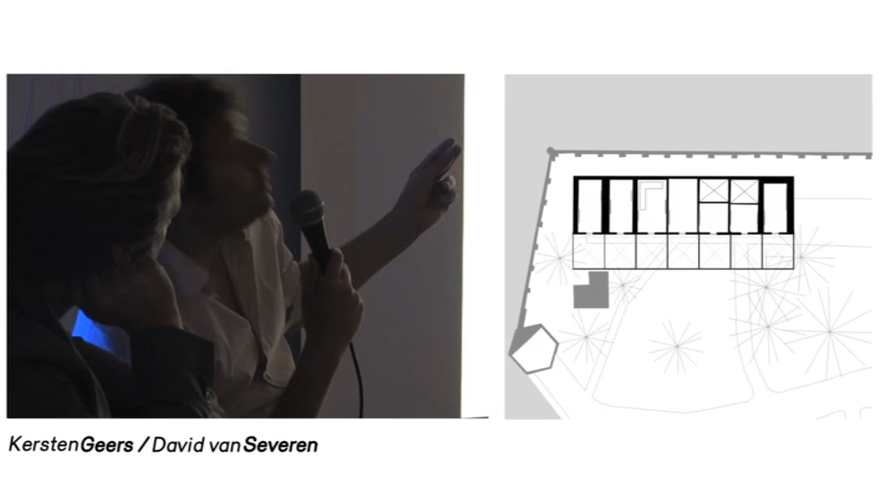So we thought we needed a device somewhere between an extra hallway, a hallway which would make access to the rooms, a porch maybe, something which would mediate between the garden, and ultimately even something which would make the building, which is just a storage building, visible.

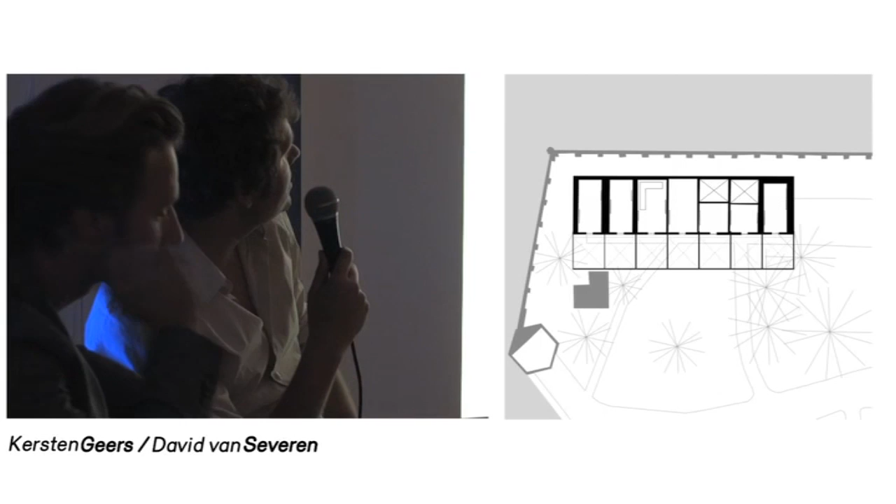So these three elements brought us to this thing you see, which is half the size—I mean it's as long, but half the width of the existing building—which we put in front, like a porch-like structure, very simple, white steel structure, with a kind of roof made out of a mesh, a kind of woven tissue.

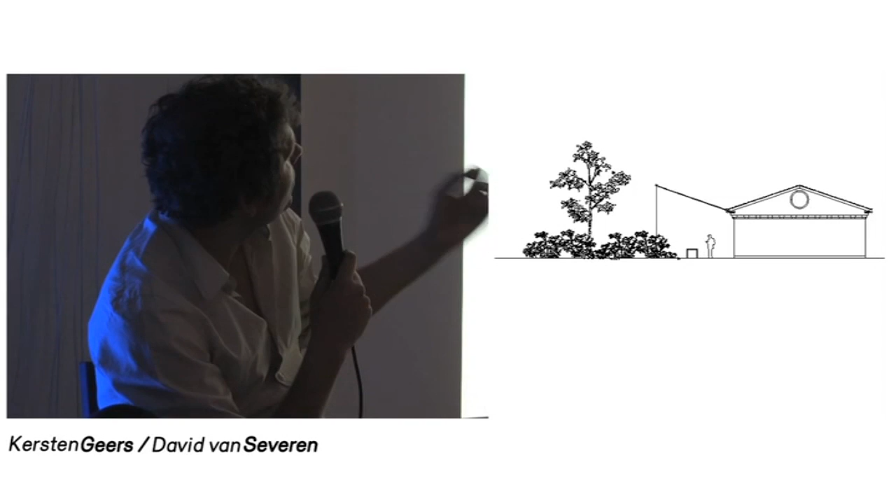Which would serve all these demands. And you see that the garden partly walks into that room, or it's partly part of that room, and partly, of course, just building.

And here you see that pavilion as such, with these very, in a way, simple columns. I mean, they look very skinny, but they just work. It's economy of means, right?

So this simple steel structure, painted white, together with the doors which were in the original building—which we took out and painted white again—and together with the panels, which you can see in the next image, which we also painted white, and on which we printed either our images, our perspectives, and Bas's image, or our attempt to turn this building, which has always been there, into architecture.